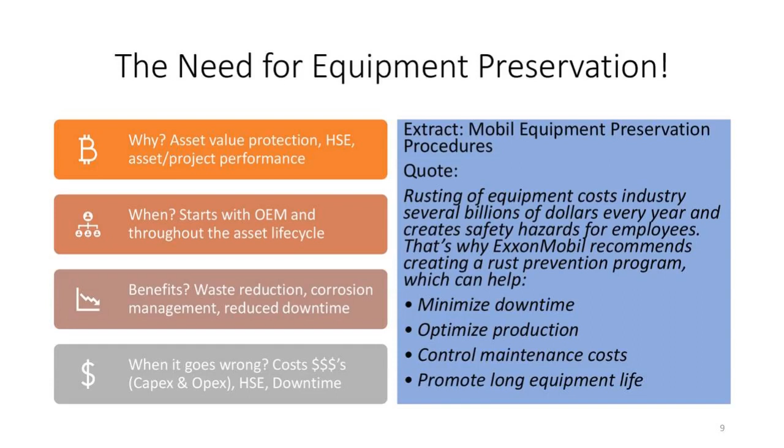So, Halil, if I want to play devil's advocate here, I could conclude that preservation is really just about the corrosion protection of equipment and materials before they go into service. Would you agree with that? Well, Chris, it is beyond corrosion management. And one definition that I always like to use for preservation is it's a set of strictly defined routines, schedules, procedures, and process actions that keep tagged pieces of equipment in working order. So it covers other equally important aspects, such as corrosion, but it's beyond that.

It covers mechanical protection through material handling, inspection protocol of equipment and material during the different stages of the asset life cycle. It also includes a set of mechanical maintenance activities related to different components of the equipment. Another important aspect is the protection of equipment against microbial induced corrosion, scaling, molds, fungi, and even dust and sandstorms.

Cleanliness, especially when it comes to the internals of pipelines or internals of equipment, is another major aspect of preservation, as it's considered a major delay factor in commissioning, especially in oil and gas projects. Again, it has to do with compliance with HSE requirements when it comes to disposal and discharge of preservation materials and fills. It also includes a clear set of periodic monitoring and inspection activities documented through the use of a dedicated preservation program to ensure integrity and continuous effectiveness of the preservation itself.

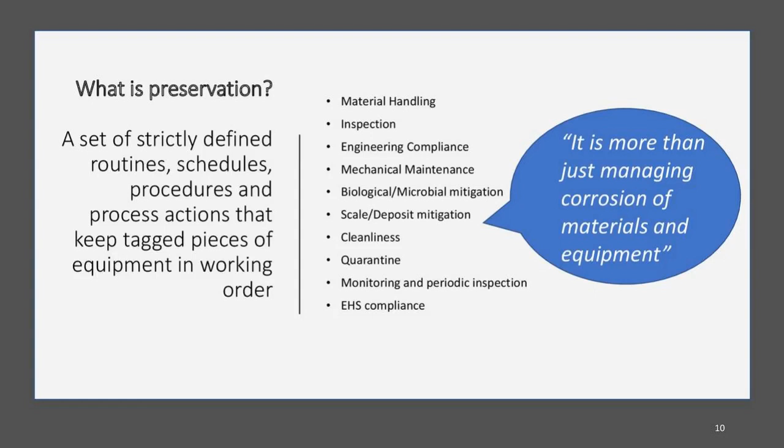All right. Well, I think you convinced me that there's a lot more to it than just thinking about it as corrosion protection of our equipment and materials. And we'll talk more about that later. Give us some of your perspective about the impact on projects, would you?

Sure, Chris. The industry performance data and our experience from the field suggests that lack of equipment preservation is one of the main contributing factors to schedule delays. Of course, it depends on the nature of the project, whether it's upstream, downstream, or midstream. A lack of preservation contributes to schedule delay between 10 to 20%. So, for example, in a 36-month project, lack of preservation can cause up to a 6-month delay, if not more in some cases.

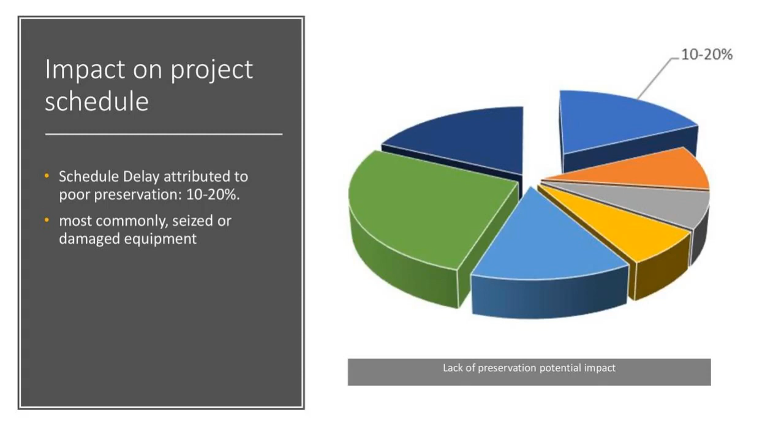Why more important now than ever? It's not only the question that we raised, Chris, in our presentation title. It's not only related to the pandemic crisis that we're passing through at the moment, but also to the new normal in industrial construction projects. The scale, complexity, and nature of projects which have recently been or will be executed is unprecedented.

Historically, the same report shows that we have failed to manage such large projects successfully, with more than 73% of the projects over schedule, and 64% of the projects suffering from cost overruns. And in both cases, equipment preservation can be a contributing factor to the project cost overrun, and it becomes an even more pressing requirement when the project is facing a schedule delay due to other reasons. In fact, proper preservation is an area that is notoriously overlooked, and projects on a daily basis are paying dearly time and time again.

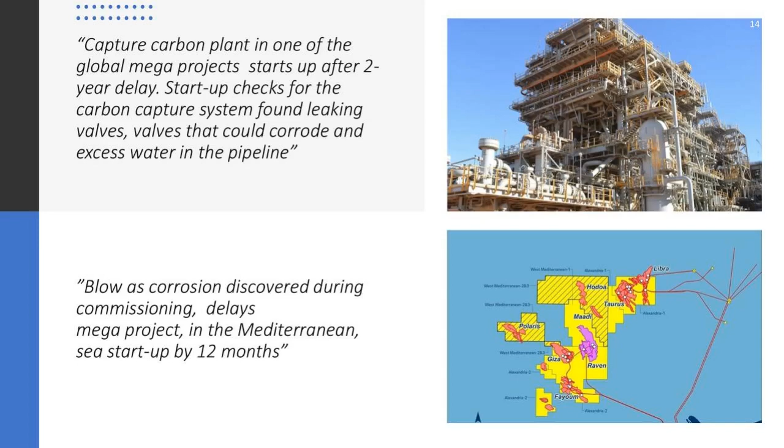Definitely, Chris. Just to help us quantify the monetary value of the impact of the delay. For example, in a 9 million metric ton per annum refinery capacity, it costs about $1.5 million per each day of delay. So a delay on such a project scale can be between 3 to 12 months. This means an impact between $150 to $700 million as loss of investment. Not to mention the cost of rework and recommissioning associated with the delay for the contractor themselves.

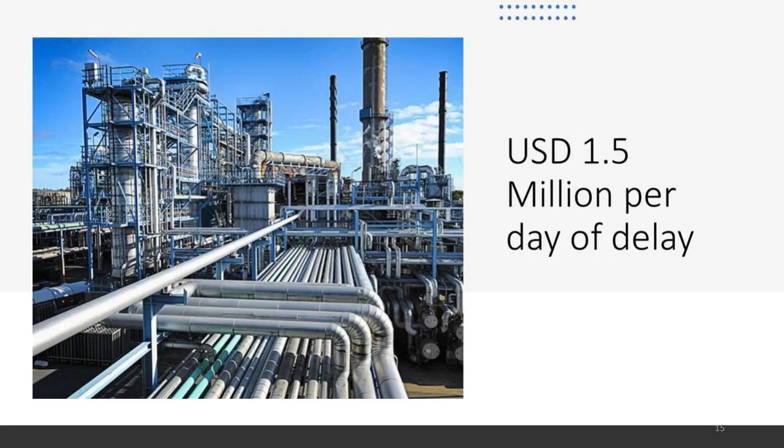Why don't you go ahead and share with us a few specific examples of equipment failures that you've seen and what the consequences have been? Sure. The lack of preservation, Chris, affects all types of equipment: static, rotating, electrical, instrumentation, and even civil engineering items. Several types of damage occur at the site due to lack of proper preservation during storage in the laydown yard, after installation, and during pre-commissioning.

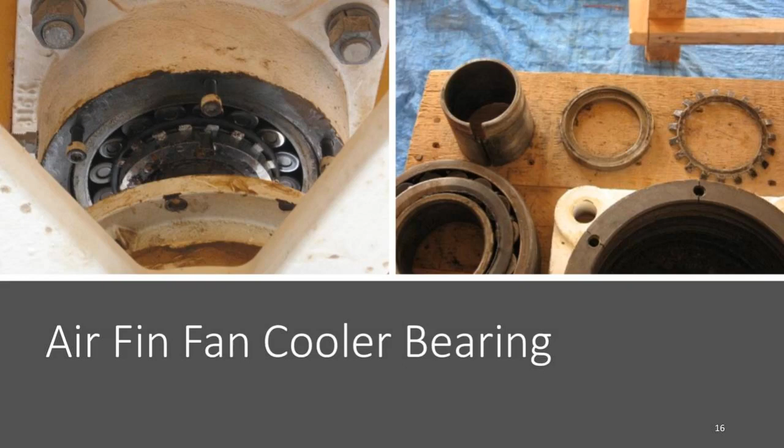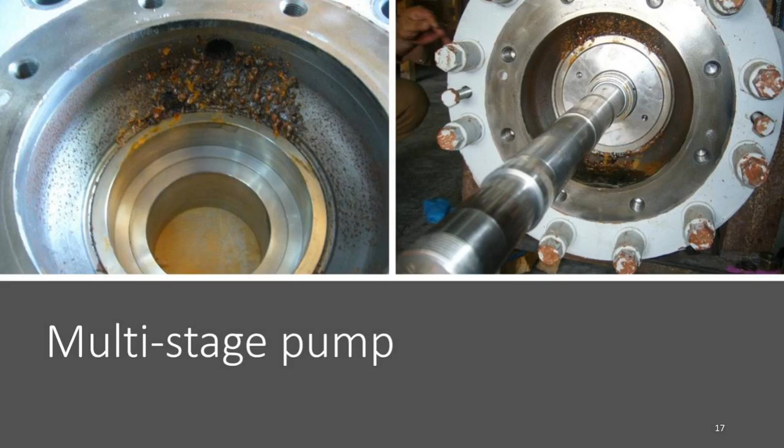The consequences usually are repair or purchasing of equipment that causes delays due to all the necessary rework, installation and commissioning. For example, in one of the projects, a total of 8 large air fin fan cooler bearings were badly mechanically damaged due to lack of preservation. Another example is a multi-stage pump that showed corrosion in its internals, which had to be dismantled and reconditioned before actual commissioning.

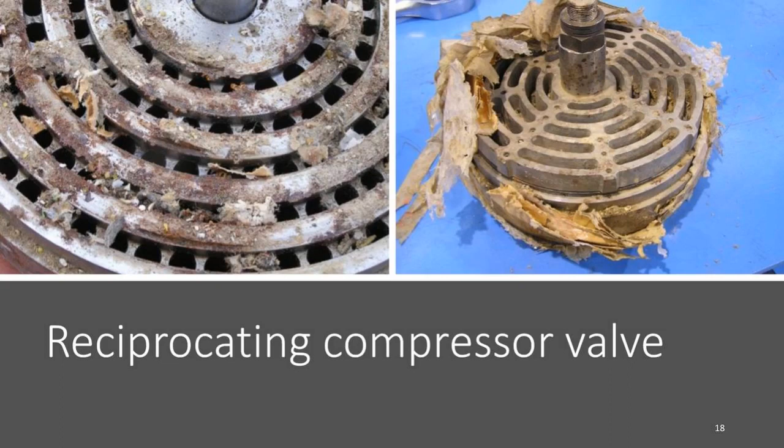Another example is a reciprocating compressor valve, which is supposed to be a 2-year operating spare stored inside the warehouse, but was found badly damaged within only 3 months of plant startup due to lack of preservation. There are many other examples, Chris, of lack of preservation, especially in locations like the indoor or outdoor storage facility in a laydown yard in the project, where equipment is received with protective packaging from the OEM, which the industry standards refer to as initial preservation.

And there is a huge confusion about preservation activities on site and the protective packaging or initial preservation that comes from the OEM. Initial preservation in many cases gets compromised during inspection at customs and storage laydown yards, such as the pictures on the slide on the left, where you have deteriorated tarpaulin material that has degraded over time due to direct exposure to UV rays. And on the right, we can see an opening where the protective packaging was compromised because of inspection during customs clearance, and it wasn't taken care of when it was received on site for several months.

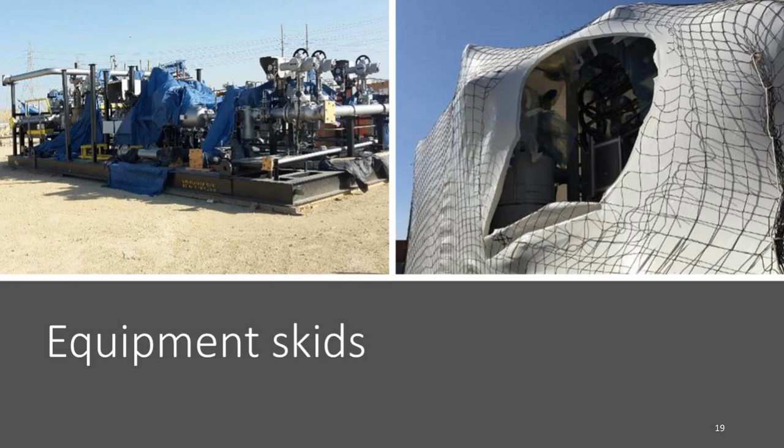This is an example of stainless steel internal trays that got pitted because of sandstorms, where the sand particles carrying chloride particles hit the stainless steel internals and caused pitting corrosion. That resulted in the project management team rejecting the entire lot of internal trays, and the contractor had to place a new order for stainless steel trays, and then wait for all the new internal trays to be produced and installed on site.

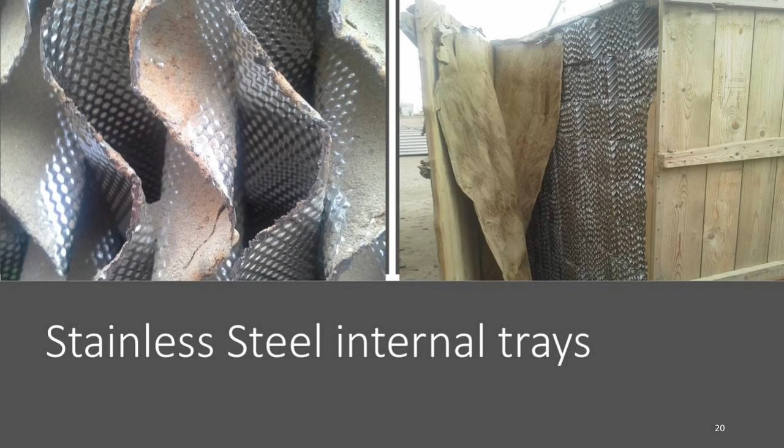Another example, final example, is the lack of preservation during construction activity here, which is the hydro testing of above ground storage tanks. We can see the level of pitting in the inside tank internals because the water that was used in the hydro testing procedure basically did not help to protect the tank during the hydro testing procedure.

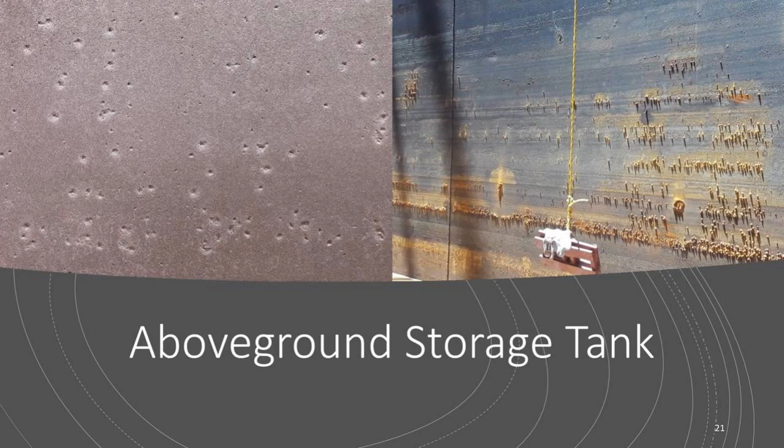Back to you, Chris. All right. Yeah. So I guess one of the conclusions from that is that the bigger the project, the bigger the challenge, given the size and the complexity. And even the largest companies and biggest projects can still get it wrong.

So we'd like to ask another question in the poll. So I'm going to ask this question about whether you've experienced failures of different types due to preservation or lack of. So if you're able to see the poll and can respond, whether your company has ever experienced failures due to lack of equipment preservation during warehousing and storage, construction and commissioning, turnarounds or shutdowns, or all of the above.

Chris, I don't see. Yeah. I don't see any answers to the poll questions so far. Only one response. Okay. They started. Yeah. Seems that the answer is going to one direction, to letter D. This is interesting. It is interesting, yes. They're quite balanced. Shall we end the poll? Yeah, we'll end the poll now.

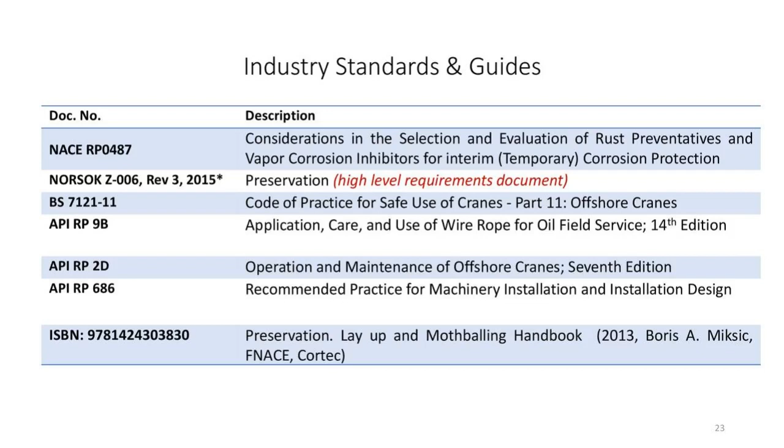So my conclusion on this subject is that there's actually very little published industry standards and guides, but one of the documents out there that represents, in my view, a good starting point is NORSOK. So NORSOK is the Norwegian Offshore Standards Organization. Well, it started off as offshore. It covers all technical and industry standards now in Norway.

So they have a preservation standard that was originally issued or published in 1997. And there's a third revision of it now in 2015. And it's quite a high level document, about 20 odd pages. And it defines the principles and structure that ensure equipment and systems are kept preserved during all phases of the project before being taken into use. And it has sections on preservation principles, on preservation execution, and gives examples of what should be in preservation documentation dossiers.

It goes to some lengths also, I think, to recommend that because of the vast amount of information and data that is generated over the life cycle of a project, computerized systems are really the only way in which preservation requirements can be efficiently and effectively captured, and that the system should provide not only what the requirements are for all tagged equipment, but also the last and the next dates for preservation based on assigned intervals. So I recommend it as one of the few more complete documents out there in the industry, but I think we need more.

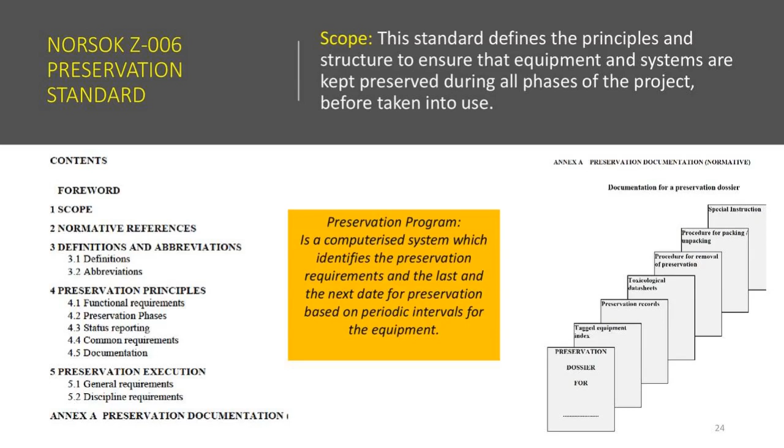So, Halil, let's talk about preservation methods. Sure, Chris. Now, we talked about the industry standards, and according to my experience with the industry standards, which I reviewed most of them, they are mainly based on conventional preservation techniques, which have their own advantages and limitations. For example, as we can see on the slide, desiccants, general oils and rust preventives, dry air, which we might not have the time to cover their pros and cons now.

But one very common example of conventional preservation methods is the use of nitrogen purging or blanketing. One of its main benefits is it's a commissioning friendly option. It doesn't impose any process contamination. However, it has associated limitations in terms of logistics, frequent inspection, and replenishment requirements. It also imposes health hazards that need to be managed.

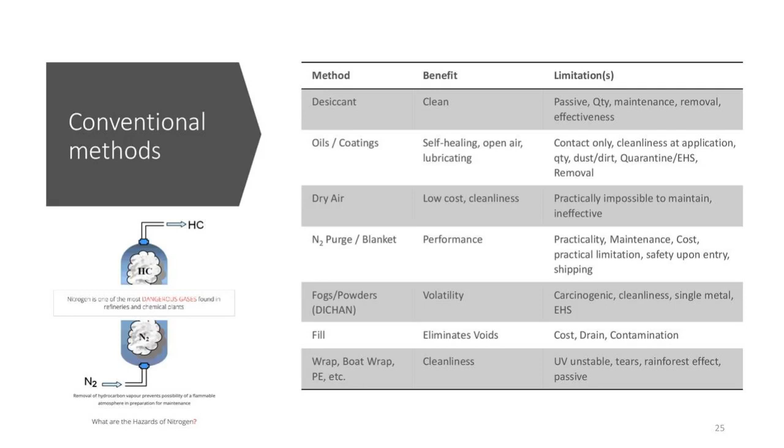So one of the unconventional techniques that is not very often covered in the standards is VPCI technology. And I will explain why I use the term unconventional approach. VPCI technology has been out there in the industry for a few decades, but mainly used in packaging applications such as plastic wraps and papers and foam pads.

Now, this ability to evaporate enables the VPCI molecules to provide protection in three phases: the continuous electrolyte, the vapor phase, and the interface between the vapor phase and the continuous electrolyte.

Now, the vapor phase corrosion inhibitor technology itself is not unconventional, but introducing it to fills such as hydrotesting water, combining it with nitrogen and dry air, is what is unconventional. The introduction of VPCI complements nitrogen and dry air performance and makes them more resilient to site conditions. I will share some examples of successful implementation of such an approach in some of the onshore and offshore projects that we had.

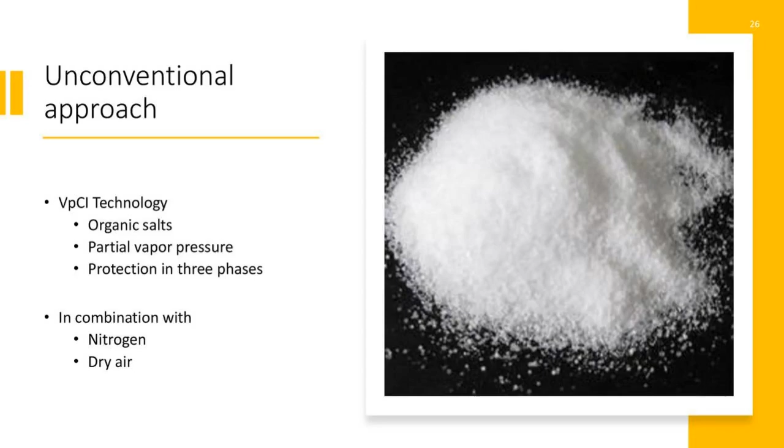Now, Cortec vapor phase corrosion inhibitors have several benefits. They provide three-phase protection, as I mentioned in the previous slide. They provide multi-metal protection, so not only ferrous, but also yellow metals and copper and brass, etc. They don't require replenishment if the preservation conditions were maintained as requested during the preservation duration. They can be inspected without imposing health hazards like nitrogen.

Vapor phase corrosion inhibitors also have limitations, like any other technique, such as potential contamination of the system if the wrong product was selected and compatibility was not verified during the product selection phase. It also requires maintaining an enclosure most of the time during the preservation duration, but it doesn't require a hermetic seal. Internals protected with VPCI can be inspected periodically without the need to degas or replenish like nitrogen.

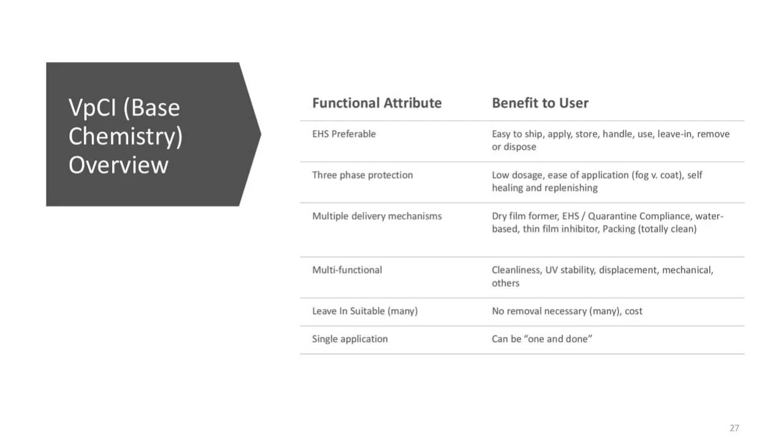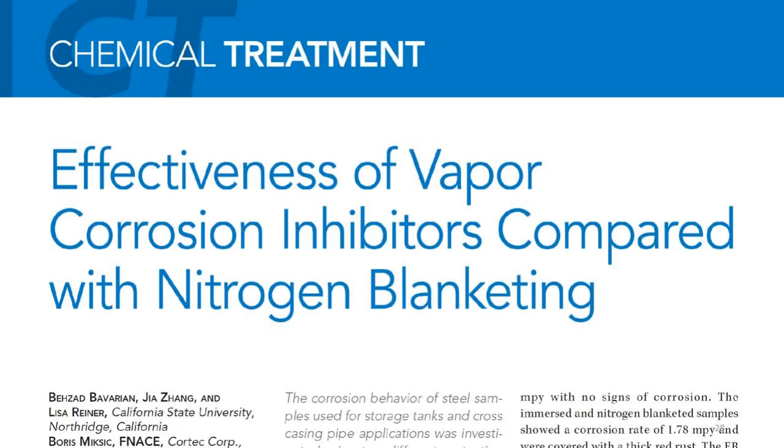And to demonstrate the effectiveness and the synergistic effect of combining VPCI with nitrogen, a professor at California State University conducted an experiment where he devised two sealed containers, half full with an NaCl solution, to introduce a corrosive environment. He installed two LPR probes in the liquid phase and two ER probes suspended in the vapor phase to monitor the corrosion rate in both media.

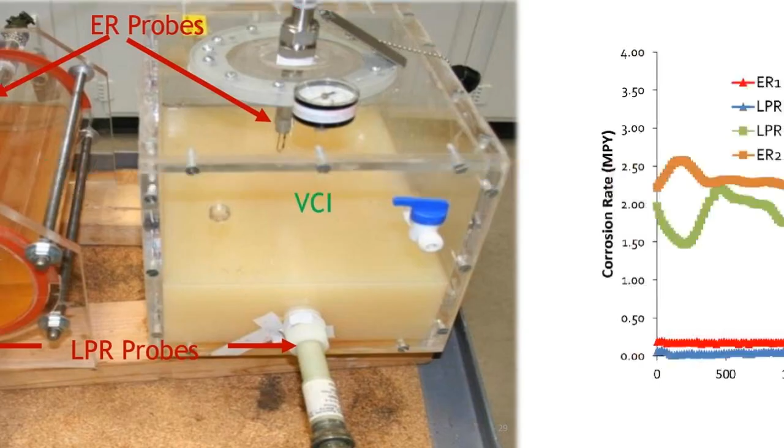He injected the first container, on the right, with VCI, and the container on the left with nitrogen. And he monitored the corrosion rate from the LPR probes and the ER probes over 4,000 hours. And the findings, as you can see from the slide, the LPR and ER probes in the nitrogen blanketed container were showing an average of 2 to 2.5 MPY for about 3,500 hours, whereas the LPR and ER probes in the VCI protected container showed less than 0.2 MPY.

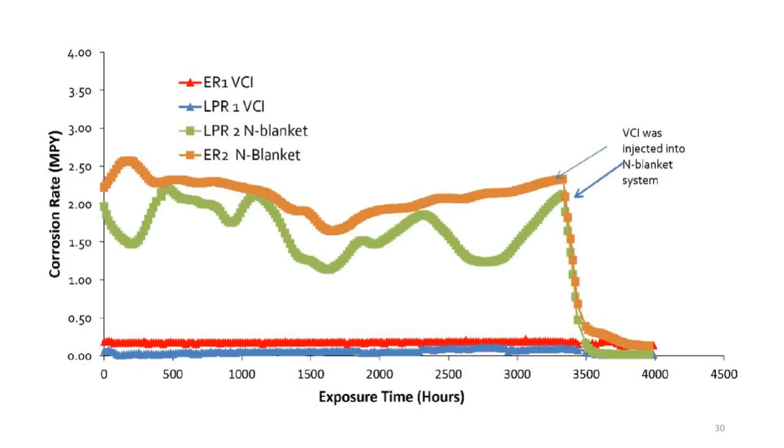And what is interesting is the effect of injecting VCI towards the end of the experiment into the nitrogen blanketed container, which ended up reducing the corrosion rate of the LPR and the ER in a matter of 200 hours down to the 0.2 MPY range. And this slide shows the surface condition of the different probes used for the VPCI on the left compared to the probes' surface condition for the nitrogen blanketed container on the right.

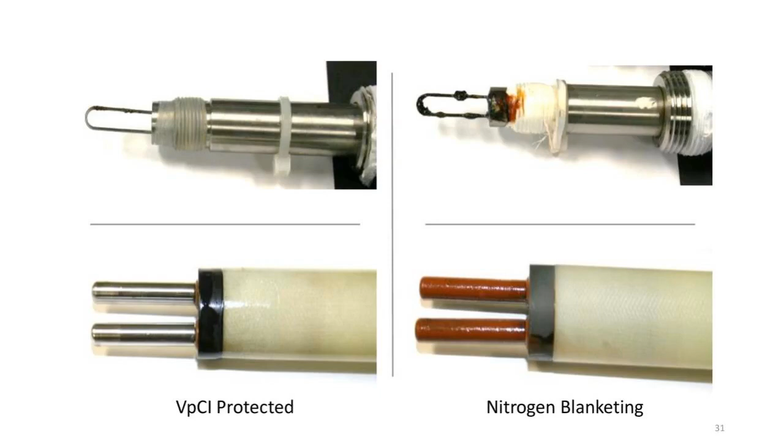Back to you, Chris, on the best practice. Yeah, okay. So let's talk about best practices. Perhaps we'll have a quick poll again, a very quick single question at this point. I want to ask about whether you have a designated responsible person in your organization for equipment and material preservation.

All right, I think we're getting a pretty solid indication of what the overall answer to that question is, which is encouraging, but could do better. So let's end the poll at this point. And Halil, best practice is a term that's often abused and misused. Tell us what you consider to be best practice.

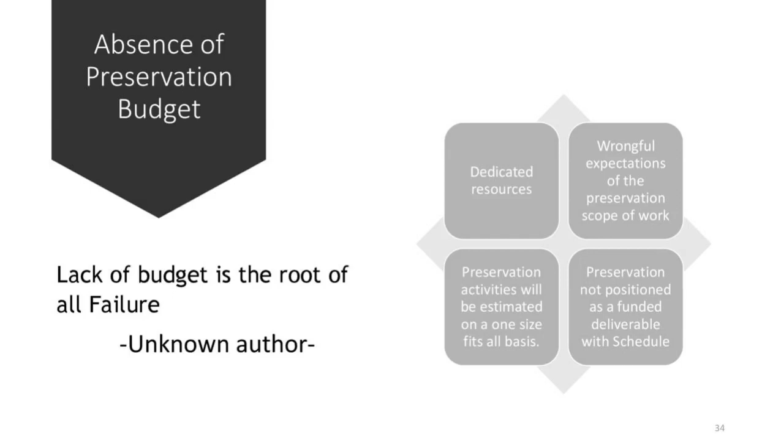The second area is lack of integrating the preservation philosophy very early on during the front-end loading and the front-end engineering design. So that's the budget and also the design and engineering aspect of the project. Such lack of integration may lead to adopting less effective or even ill-suited procedures for the type of equipment and the system under consideration.

In many cases, what is applicable on equipment level might not be applicable on a system level, Chris. Which in many cases can be ignored by equipment manufacturers as they only aim at protecting their equipment, but sometimes we miss on the fit of the preservation procedure on an equipment level with the system. So developing that philosophy and plan from early on helps avoid such challenges.

On the other hand, introducing preservation as a funded deliverable very early on in the project helps integrate preservation methodologies with construction activities, which, from our experience, have always resulted in substantial savings and very reliable results during the construction of the project.

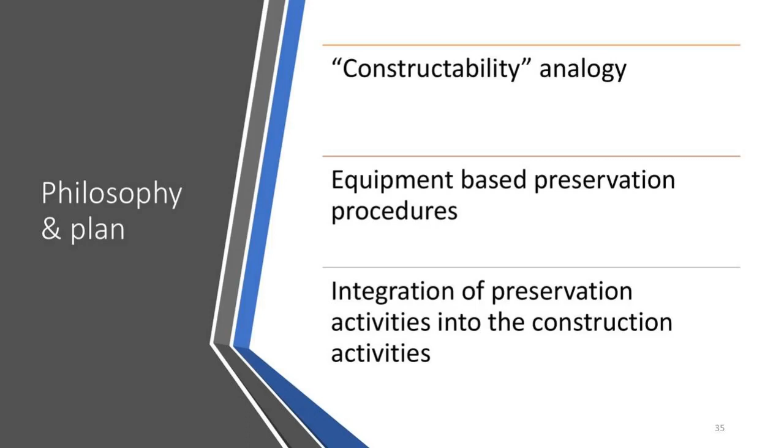The third area is the management and coordination between the different stakeholders. And when we say mega projects, Chris, we always talk about projects beyond $1.5 billion in value. And usually they are complex in nature. They include multiple packages. They have tens of contractors and subcontractors working on the project site, hundreds of suppliers.

This complexity, if not managed properly by a preservation team that is responsible for harmonizing and coordinating all the preservation procedures and routines among all the different parties, preservation unfortunately fails, and it fails sometimes miserably on projects. One saying that can be used in this regard is about roles and responsibilities. As Edwards Deming says, divide responsibility and nobody is responsible.

And I would like here to make myself clear on that. There is a responsibility and a role for every stakeholder to take, but only one party should be accountable for the results of the preservation program, which is the preservation management team of the contractor. So the OEM can play a role, the client by providing standards, specifications and requirements, the engineering contractor or the design contractor. There is a role and responsibility for everyone, but the accountability should be on the preservation management team of the contractor.

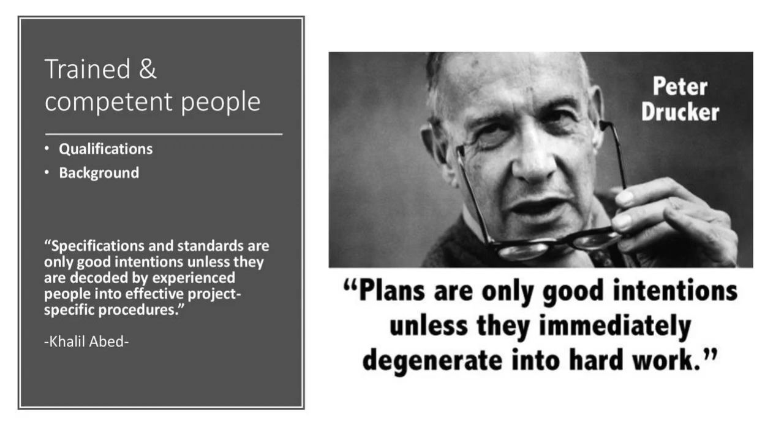And as Peter Drucker, one of my favorite authors on modern management, says, plans are only good intentions unless they immediately degenerate into hard work. And I say specifications and standards and plans are only good intentions unless they are decoded by experienced people into effective project-specific procedures. So without having trained and competent people, Chris, we'll continue to have failures in the preservation programs on construction projects.

Now, in the last 13 years working with contractors, with operating companies, we kind of developed a perspective on what would be a best practice and how we can inject certain aspects into the preservation management program to help achieve a successful preservation program. Usually, successful implementation of preservation programs are the ones that manage to create a link between the different parties, the requirements and the objectives of the operating company, the design contractor, the construction contractor, and the OEM.

And this is usually done through deploying a preservation specialist third party, that is a third party to all the stakeholders, who have experience with challenges of equipment preservation and best practices from the field. And they become part of the management team to develop project-specific plans and preservation procedures, as we can see here on the second point. And they utilize industry-proven technology. So it doesn't have to do with VPCI in specific. They can utilize conventional and unconventional procedures that best suit the requirement of the project. So they will rely on industrial-proven technologies, which includes the conventional and unconventional preservation methods.

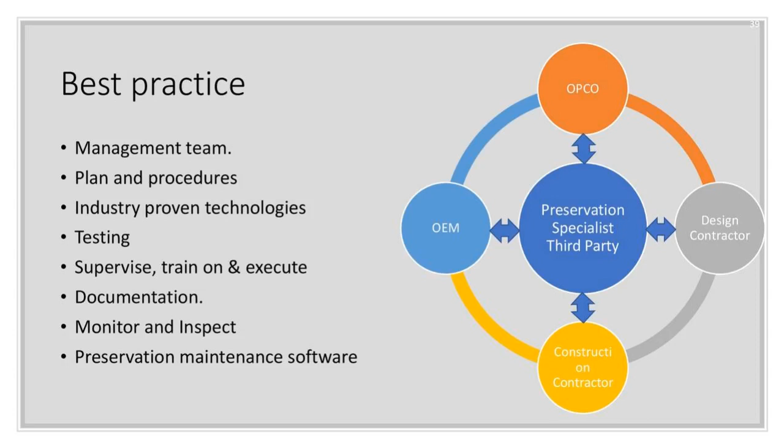They conduct compatibility testing, they supervise and they train preservation technicians, and they monitor and inspect and document all these activities through a preservation maintenance software. So injecting a preservation specialist third party into the equation helps create those links and results in better management of preservation programs in construction projects.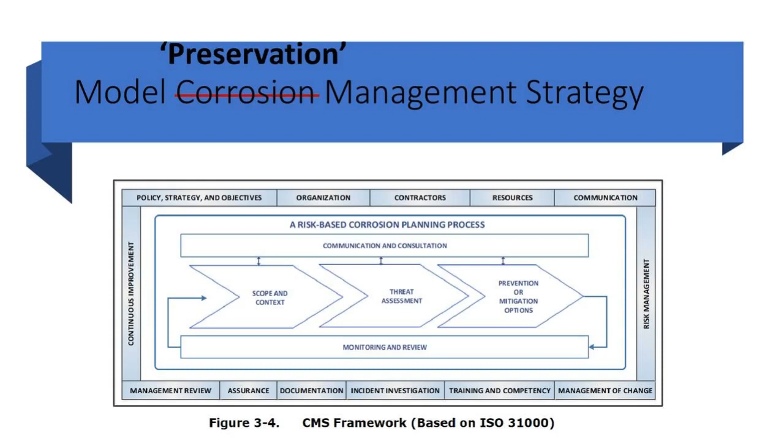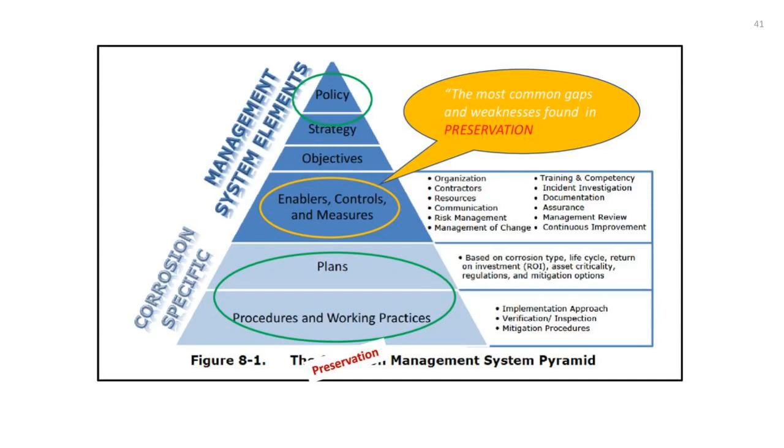Another analogy between preservation and corrosion is the corrosion management system pyramid of the IMPACT study, where we can see plans and procedures and practices at the base of the pyramid, and the policy, which is a management system element, at the top of the pyramid. But most common gaps and weaknesses that we find are in the enablers, controls, and measures section, which includes similar elements to what we covered in the previous slide. Now, Cortec as a preservation specialist company.

So Halil, just before you move on to that, the final two poll questions. Let's have a look at: does your company have a documented preservation strategy and procedures? Just a simple yes, no, don't know. I see the yeses were out there quickly. All right, I think that gives us a pretty good picture.

And then one final question. How are your equipment preservation records and information recorded and maintained by your company? Do you use paper, Excel spreadsheets? Do you have a dedicated software system? All right. Well, the don't knows is quite enlightening. Let's end the poll at that point.

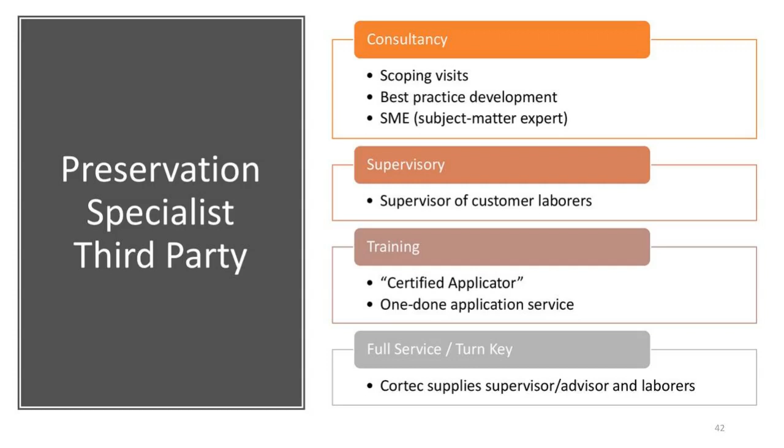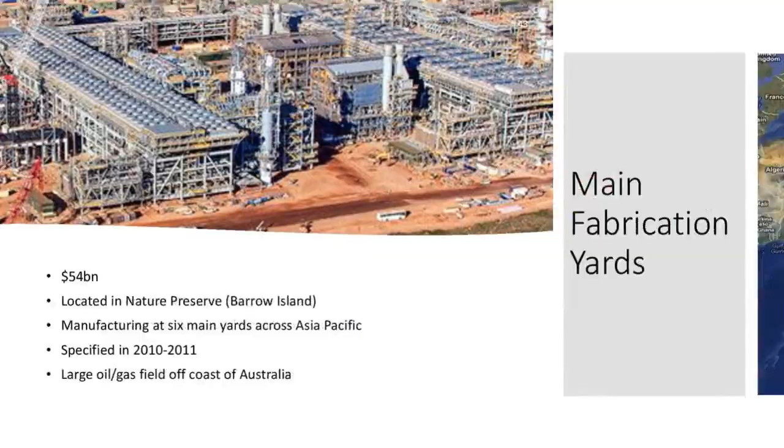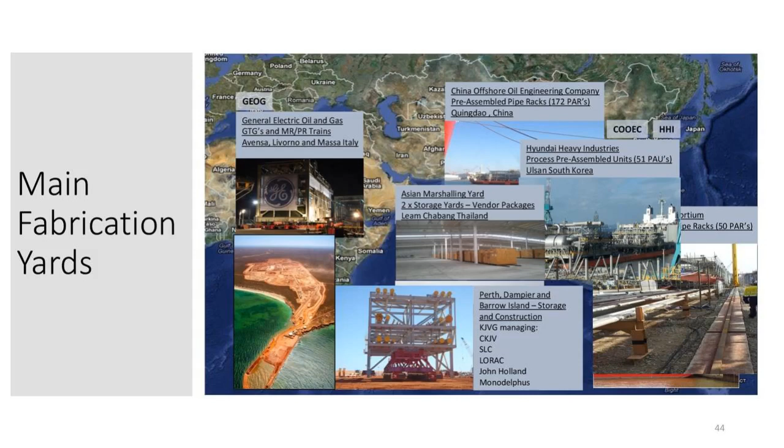The overall scope of the preservation team was a successful delivery for preserving more than 400,000 tagged equipment from pumps, valves, turbines, compressors, and successfully coordinated and harmonized the preservation requirements among more than 700 suppliers and vendors.

And I think from the poll answer to what kind of system our customers use in managing asset preservation activities, we both saw that to a great extent it's either paper filing or Excel sheets. And as you rightly said, Chris, from the beginning, the only way to manage and document preservation activities is through a computerized approach and dedicated software for that.

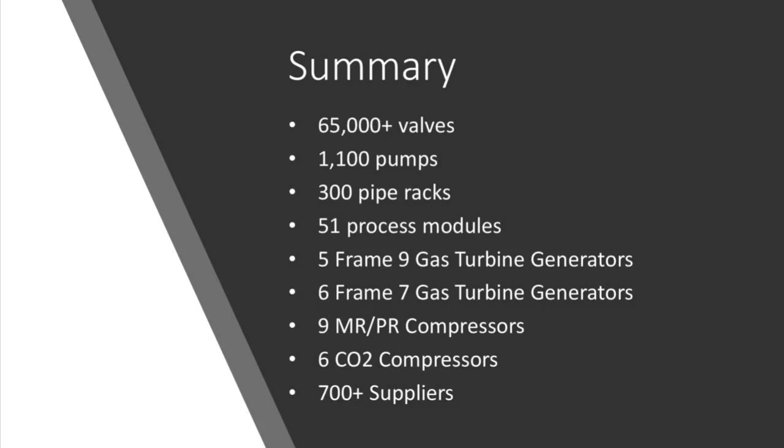Another example is taken from an offshore field development project in the Arabian Gulf, which is a $4 billion offshore field development. It was a modular construction project where VPCI was successfully used in preserving all the pre-assembled modules and racks instead of nitrogen, which resulted in tremendous savings for the contractor in terms of rework of welding flanges to the beveled ends of the piping, and made the site inspection and extension of preservation duration much easier.

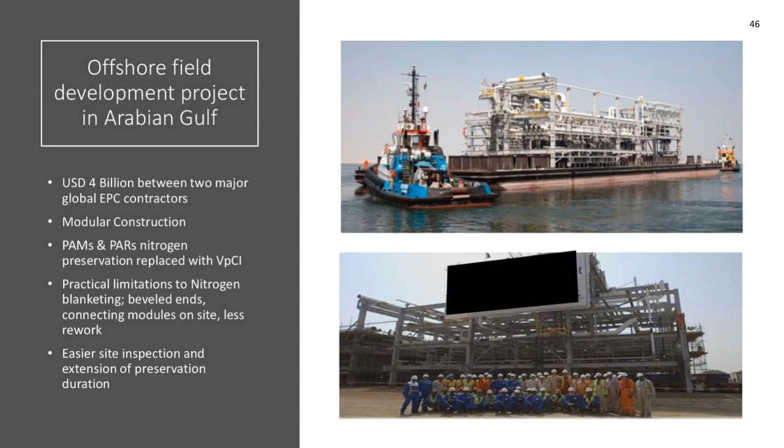Another example is for another offshore field development project, a $3.5 billion project. The scope included preservation of all equipment on 7 wellhead towers and subsea pipelines. In this project, VPCI product was successfully introduced into the construction and the commissioning activity, which is the hydro testing, and eliminated the need for drying and purging with nitrogen.

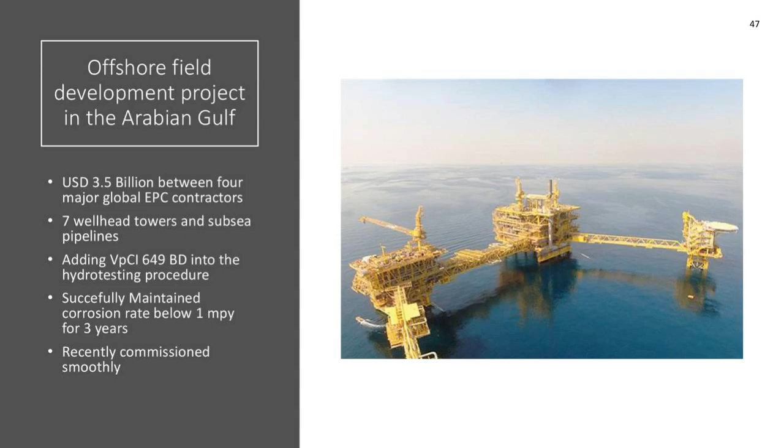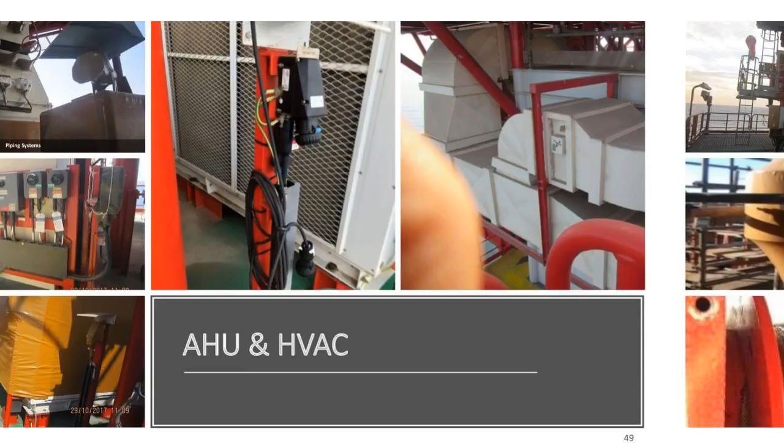So VPCI 649BD, which is a hydro testing additive, provided protection for 3 years and kept the corrosion rate below 1 MPY in an offshore environment. The project has been recently commissioned smoothly with fantastic results. Some of the systems are the piping systems on the platform, HVAC systems. I'm going to skim through them very quickly. Crane and hoists, downhole corrosion inhibitor skids, platform security and communications, switchgear and battery rooms.

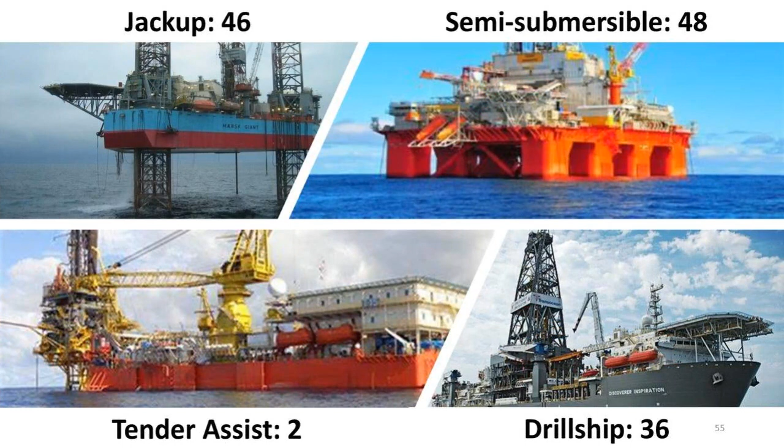And also, Cortec has been globally active in other marine and offshore projects around the globe, helping clients and contractors to preserve FPSOs, FLNGs, FPUs, jackups and semi-submersibles, tender assists, drilling units, and drill ships.

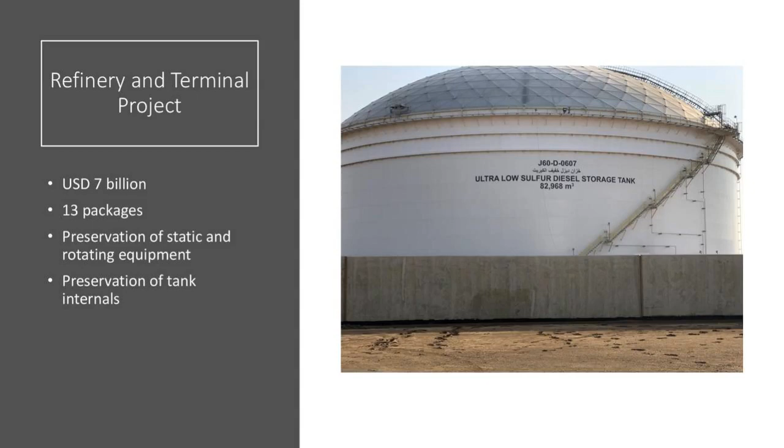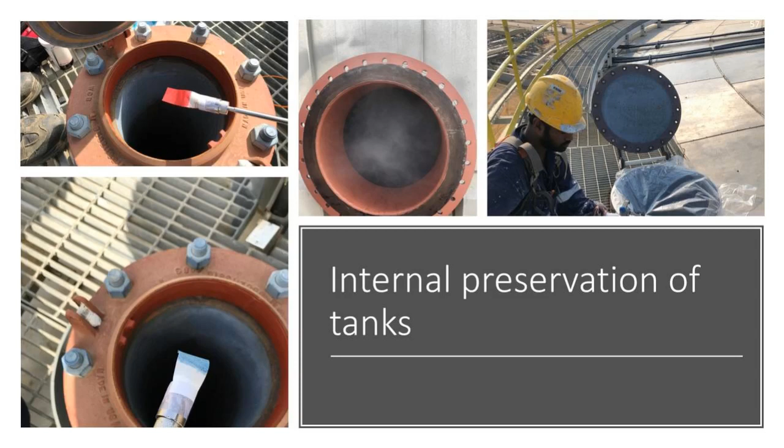The final project is a downstream, Chris, which is a refinery and terminal project in the Arabian Peninsula, a $7 billion project, 13 packages. Cortec, wherever possible, preserved a good number of static and rotating equipment on that project, and also, most importantly, more than 100 above-ground storage tanks, basically using VPCI technology, where the vapor phase corrosion inhibitors were designed and the dosage was optimized to provide protection up to 2 years inside above-ground storage tanks. These are some of the examples from our side, Chris, on successful implementation of preservation programs.

Thank you, Khalil. And I hope we've conveyed to everyone that there's a lot more complexity to delivering an effective preservation program. And it's not just about managing corrosion of equipment coming from suppliers. There's a whole management system concept behind it. It requires resources, and it has to be thought of right from the very beginning of the projects.

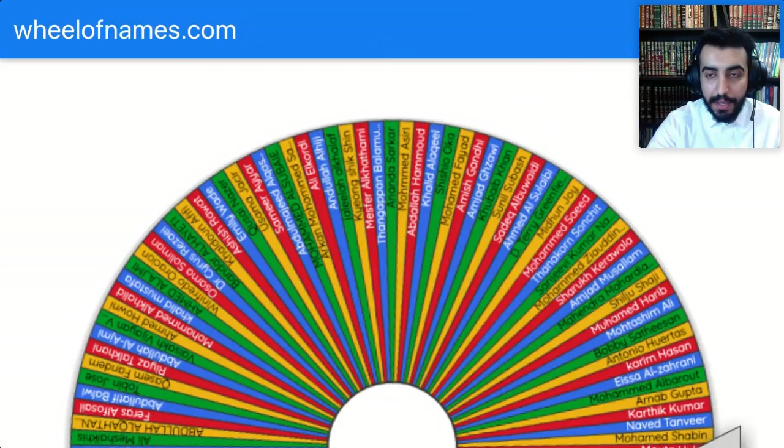By this, we want to conclude our webinar. We want to express our appreciation, first of all, to the attendees, and secondly, to our valuable presenters, Mr. Chris and Mr. Khalil, for the informative presentation. The number of attendees shows how the webinar was very interesting and very attractive. I'll leave it to you with the final remarks or speech, Mr. Chris and Khalil, if you have any.

No, we'd just like to thank you again. I'd like to thank you again for the opportunity. I think it's a great initiative. It's unfortunate the circumstances that brought it about, but I think we'll use this technology more and more.

And I think we need to compliment Dr. Terry on his fine beard.

Also, from my side, again, I would like to thank everyone. I saw that we had more than 120 attendees this time. I think that's a great success for NACE-Dhahran section. I want to thank Rakan, Yusuf, and the entire NACE-Dhahran section team for all the efforts, the preparation that we have gone through over the last 2 days. And we look forward to having more webinars because we are launching a series of webinars over the next 1 month or two on multiple topics. Yeah, we're going to consider this, and hopefully you're going to sponsor our webinars later on.